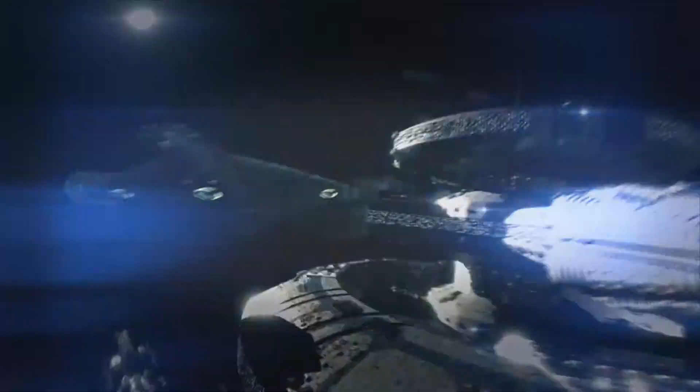Would you like to be able to see into the future? That is an intriguing question that has been contemplated time and time again throughout human history. Famous stories from the Oracle of Delphi all the way to the hysteria around the Mayan calendar in modern times have in some way dealt with the idea of humans seeing into the future. This idea has shaped popular culture and our science fiction with that one tantalizing idea of what if.

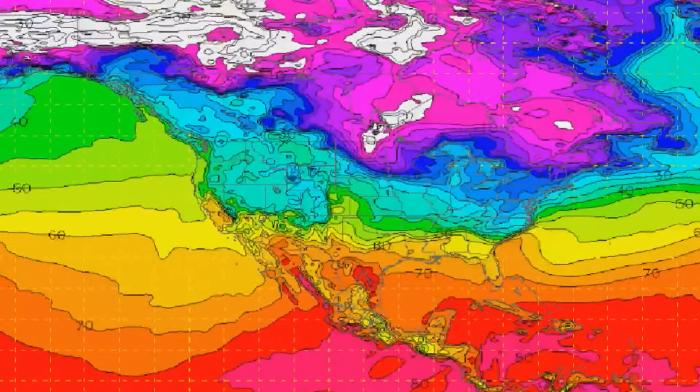In the real world, the answer to the question of can we see into the future has been answered with a resounding no. In our ever-evolving society, the trend today is to look toward the future by relying on predictive modeling to best predict the probability of an outcome. But we all know that even these well-thought-out predictions based on data often turn out to be not so predictable.

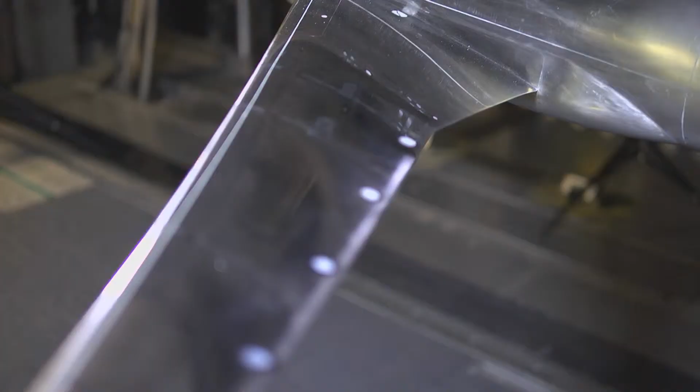Although it's clear that future events remain virtually unknowable, there is one group within NASA that comes as close as you can to seeing into the future. Throughout NASA's field centers, members of the Fixed Wing Project team are peering into the future every day and coming up with concepts that they believe will be on the next generation of aircraft. Because it takes years to plan and develop these concepts, the hardware and theories that are being tested today will be key components that enable the next generation of aircraft to take flight.

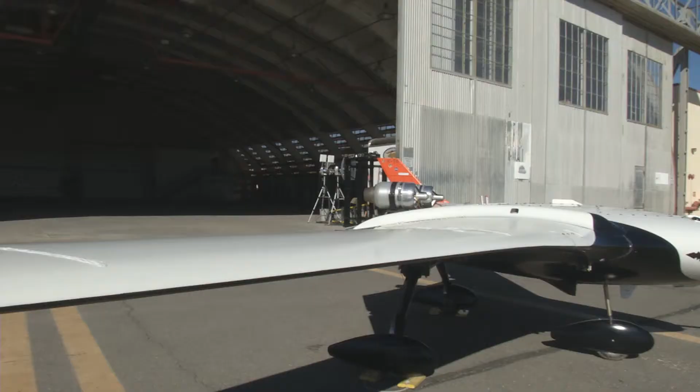On this episode of NASA X, follow us around the country as we visit members of the Fundamental Aeronautics Program's Fixed Wing Project, who are developing the framework that will shape how aircraft of the future will fly. Take a look behind the gates of NASA to see what some of these new ideas look like and how the engineers of NASA are paving the way for the ideas that will change the future of flight.

To the untrained eye, most of the aircraft of today look very similar. This is because over the past century of flight, aeronautical engineers have worked hard to optimize passenger aircraft to the point where they are as efficient and safe as possible. As a result, the basic tube and wing shape has been configured and examined from every possible angle, making it the most efficient design possible today.

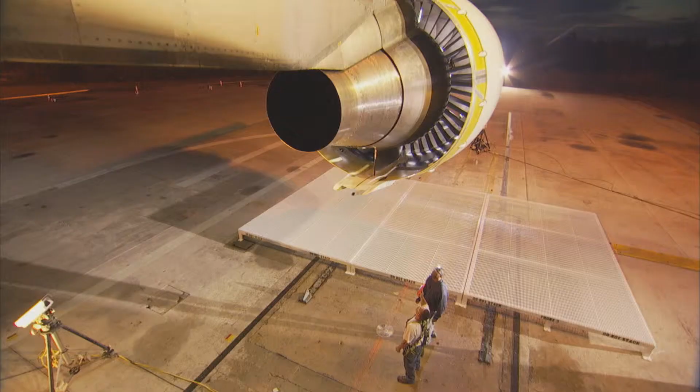Although aircraft have looked basically the same over the past few decades, if you look closely, you can see some of the major design changes. Wings that were once swept back more dramatically now are less so because of advances in aerodynamic shaping. Engines that spewed emissions by the ton are now much more efficient. Materials that were once so heavy that they significantly weighed down a craft are now much lighter and stronger.

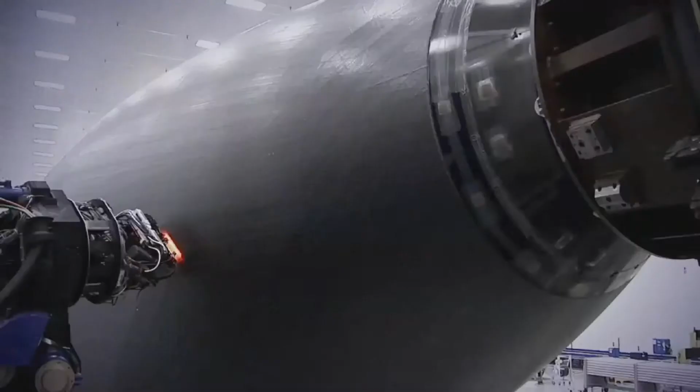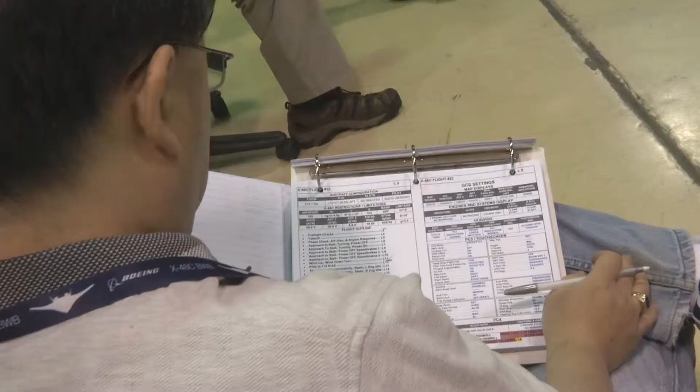With all this improvement and efficiency, it is fair to ask if there is anything else that can be done to make flight even better. The answer is of course yes. Behind the gates of NASA, there are scores of researchers who know that we can still make aircraft better because they are working toward these long-term goals every day.

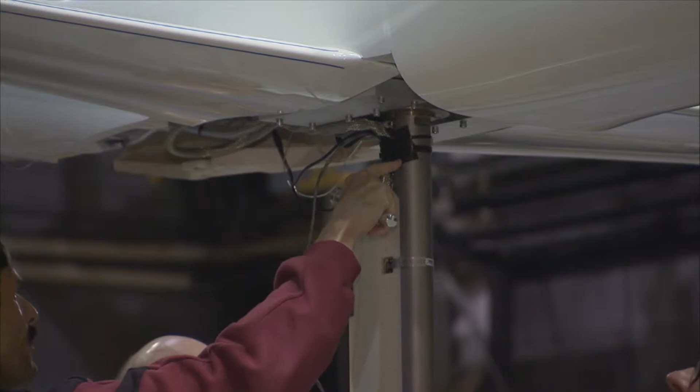Some of these researchers from the Fixed Wing Project are working on so-called N+3 configurations and goals. In mathematical terms, the letter N is where you start now. N+1 is the next step. N+2 is just beyond that, and so on. Here in the Fixed Wing Project, N+3 equates to aircraft that will be flying in around the 2030-2035 timeframe.

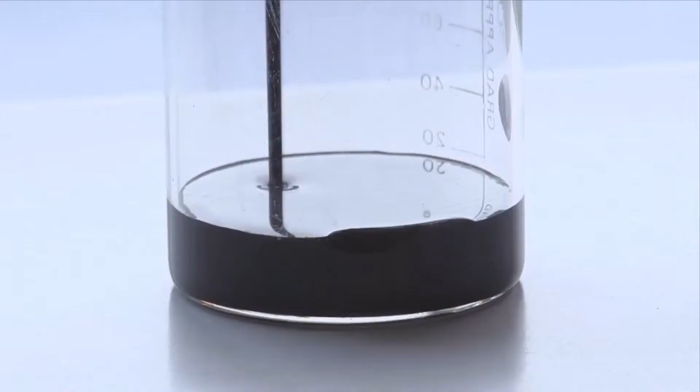For this team, everything is on the table, including engines, fuels, wings, and fuselage shapes.

Well, we need to remember the first A in NASA is aeronautics. So it's a National Aeronautics and Space Administration. Aeronautics is the field of research for airplanes. The airplanes that we fly today were researched and experimented within NASA many years ago. So we're trying to continue that tradition, that important work that we have done for the nation and the world for 20, 30 years from now.

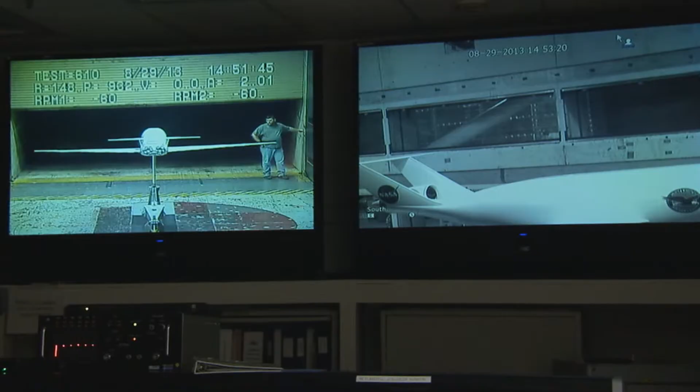Fixed Wing is a NASA research program where we are doing activities to try to improve the airplanes that we're going to be flying in the future. We're trying to make them less noisy. We're trying to make them better for the environment. We're trying to make them in a fashion that they will use less fuel.

The research we're doing is important because air travel is such an important part of your life. People travel, even if you don't travel, cargo gets carried every single day. You use something every single day that gets carried by an aircraft. It's part of our way of life these days, and it often gets taken for granted.

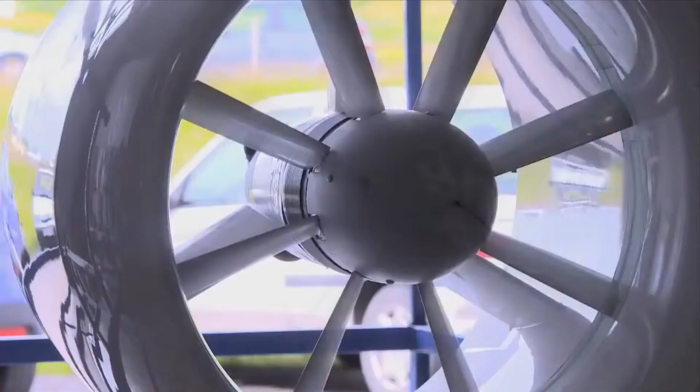There are challenges though, so we are focused on exploring and developing technologies and concepts to improve the energy efficiency and environmental compatibility of transport aircraft. With this mandate to significantly lower noise and emissions and increase performance for subsonic aircraft, there will be a need to address virtually every aspect of the current aircraft configuration, including developing new materials and engines, testing alternative fuels, and even changing the fundamental shape of the aircraft.

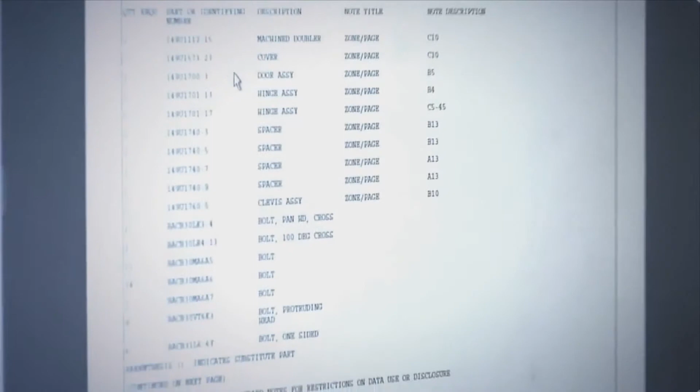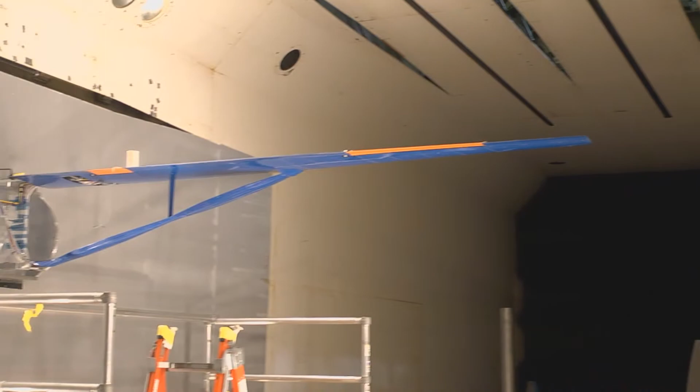All across the country, fixed-wing researchers are doing just that. Major advancements are being made into the understanding of how future aircraft will fly. Because there are so many areas of study, let's first look at something that has the potential to be used today as well as in the 2030 timeframe: alternative fuels.

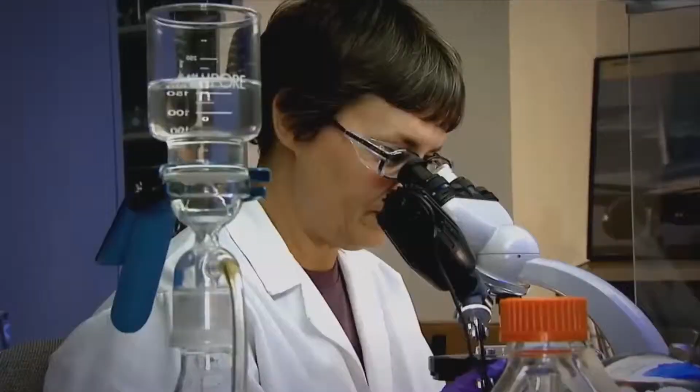On this beautiful morning at NASA Dryden in California's high desert, a test called ACCESS, or the Alternative Fuel Effects on Contrails and Cruise Emissions test, was performed to study the effects of alternate biofuel on engine performance, emissions, and aircraft-generated contrails at altitude. For this test, two aircraft were flown in tandem. The first is NASA's DC-8, which will be burning an alternative fuel. The second aircraft is NASA's Falcon that will fly directly behind the DC-8 to measure and characterize the emissions coming out of the engines from the alternative fuel. Here is NASA's Bruce Anderson to explain.

NASA's role is in assessing the combustion characteristics of alternative fuels, as well as determining how these fuels will affect the performance and emissions from aircraft. To understand how aircraft affect the climate, we need to make measurements at cruise altitudes.

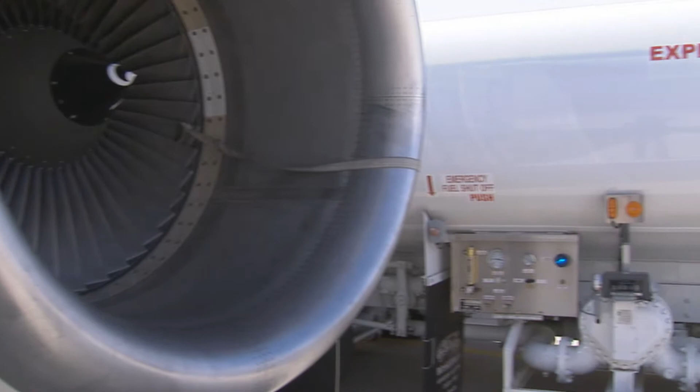So the focus of ACCESS, or the Alternative Fuel Effects on Contrails and Cruise Emissions, was to fly behind the DC-8 in flight and look at its emission and contrail characteristics as we changed from standard jet fuel to a fuel that was a blend made from camelina plant oil, with 50% Jet A added to that.

There are other groups out there. Tyson Foods is making a biodiesel and biojet fuel from chicken fat that they sweep up on the processing plant floors. So there's a number of different ways of making these alternative fuels. All of them result in a fairly clean kerosene that doesn't have nearly the contaminants that fuels from refineries do.

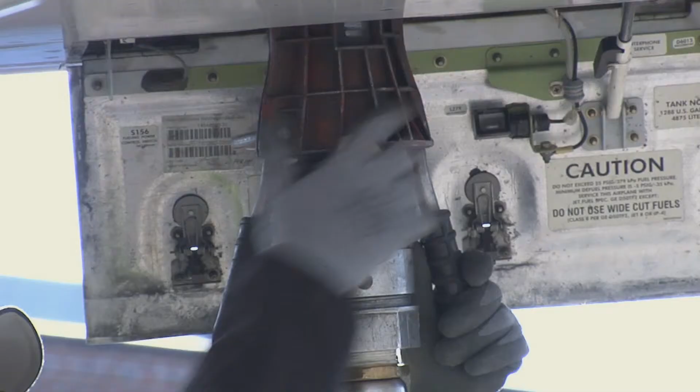The fundamental thing is the aircraft has to retain its performance characteristics when you burn a fuel. You can't have any drop in power. The fuel also has to have similar characteristics in terms of density and volume to kerosene. So what we're looking at is drop-in fuels. A lot of the fuel systems on the aircraft are designed to rely on the aromatics in fossil fuels to swell the seals and make them leak tight. So when we fly an alternative fuel, we have to mix it with standard fuel to retain those properties. Otherwise, the fuel would just leak out of the aircraft.

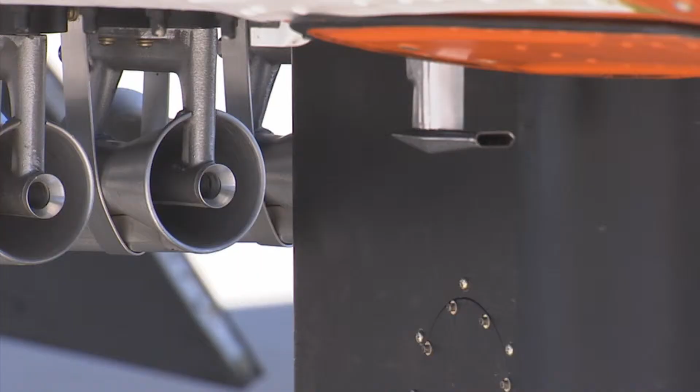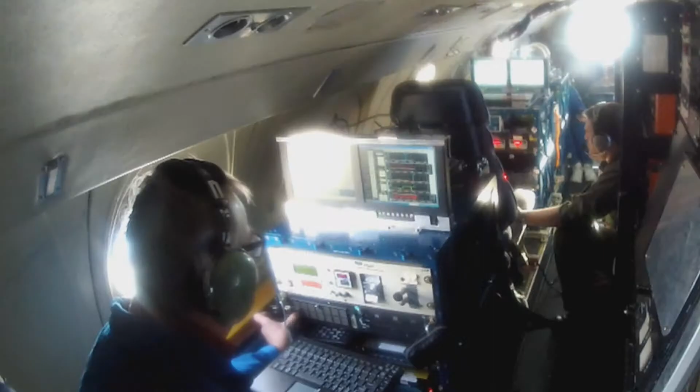And then the second thing we're looking at is just the emission characteristics—the amount of pollutant generated per kilogram of fuel burned. After the first few flights, it was shown that using these types of alternative fuels could significantly reduce emissions at cruise altitudes, particularly soot emissions. Work continues to better understand how to use these fuels and how to make them even more efficient for future aircraft.

Other than alternative fuels, there are some other ideas out there for finding more efficient ways to power aircraft. If we look on our roads today, many of the cars now being driven run on a combination of fuel and electricity. The idea that aircraft could do this seemed far-fetched only a few short years ago, but today, this idea is gaining traction. There are several ideas on how to do this, so let's take a look at a few.

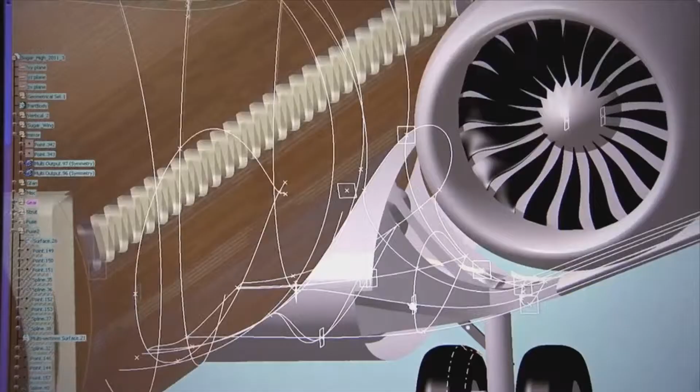Here, a team is looking over a new Boeing aircraft design called SUGAR Volt. This unique design has several interesting changes, like the truss-braced wings that have the potential to reduce the drag of the wings by making them longer and thinner. Because thin, long wings tend to flex more, designers have included a clever, efficient truss structure to support them. This design has the potential to reduce drag and weight, thereby making the craft more efficient to operate.

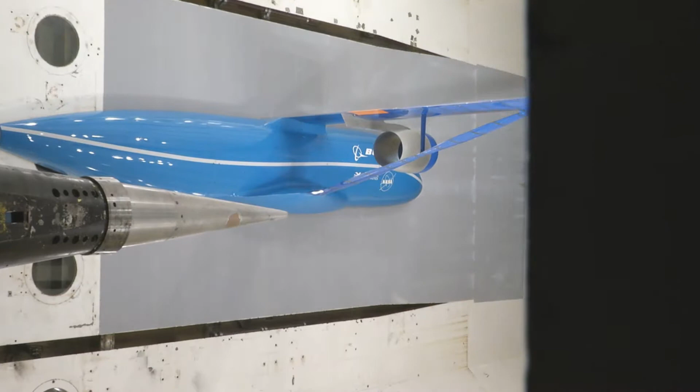At first glance, those unique structural changes may look like the biggest game changer for this type of aircraft, but the SUGAR concept holds another surprise as well. What's less obvious to the eye is that it has an unconventional propulsion system—a hybrid gas-electric concept that's closer to what you see in a Prius. It has batteries and gas turbine engine technology.

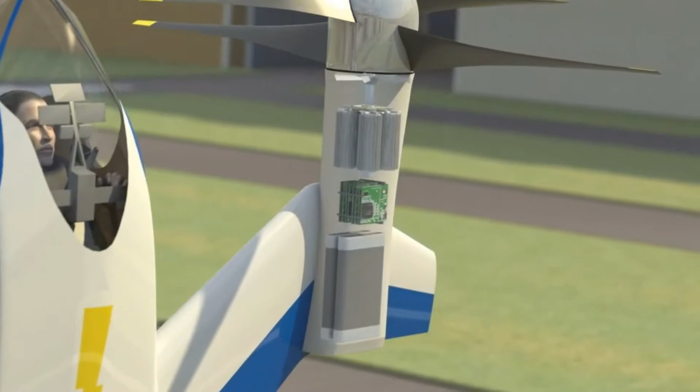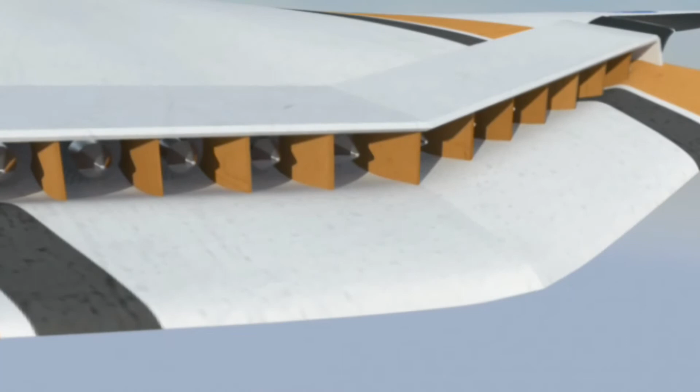It requires advances to battery technology, but those are happening throughout the world independent of the aerospace industry, and we're trying to leverage that. We do it on cars, we should be able to do it on airplanes eventually. The challenge is to take those batteries and have enough energy or power content while keeping them lightweight. Where we are today, I think, is at the dawn of the age where we could start to see electric propulsion or hybrid electric propulsion.

And you'll see it on smaller aircraft first before you see it on the large commercial transports. But that's what we're working towards. That's good for cleanliness, good for noise, good for energy efficiency. It has its challenges—that's why we're working on it, and that's why it's not being done today.

The idea behind this vehicle is to have its twin engines burn fuel when great power is needed, like at takeoff. But when the craft is in a cruise configuration, a switch can be made over to a battery electric mode to supplement or even replace power to the engines. If successful, this could reduce fuel burn by up to 70%.

Another concept called turbo-electric propulsion is being studied here at the NASA Glenn Research Center. Here is NASA's Jerry Brown to explain.

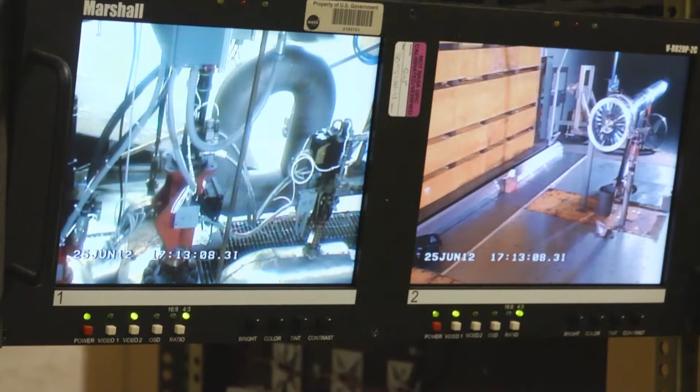There haven't been electric airplanes except in very small sizes, and the reason is that electric motors and generators tend to be too heavy for flight. We're hoping to change that, and we're hoping to get a benefit from saving a whole lot of fuel in the process. The type of electric propulsion we're talking about today is turbo-electric propulsion. We're going to keep the turbine engine because it's really good as far as a lot of power in a small power plant, and then we're going to use its power to drive a generator, send electricity to motors that drive fans that do the propulsion.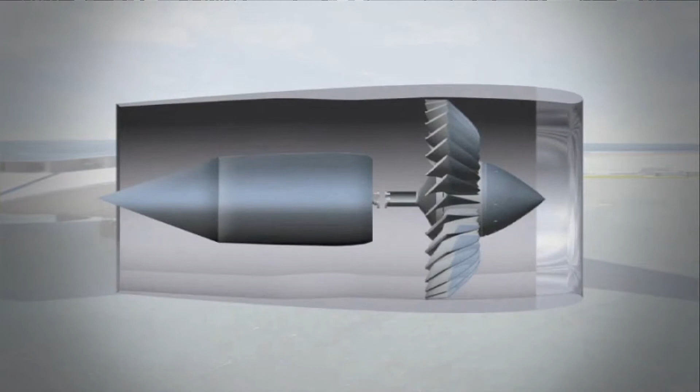This concept will look very different from vehicles of today as well. Potential designs include two large turbine engines on the wingtips that will drive two large generators inside the body. The generators will in turn power a number of fans, providing the propulsion the aircraft needs to fly.

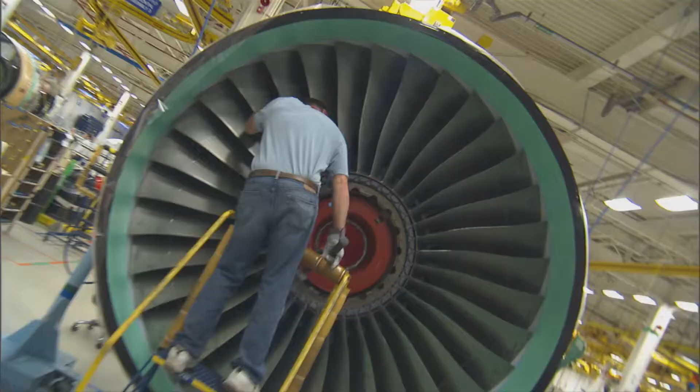What we want to do here is be able to break the turbine engine from the fan, and that gives the aircraft designer a lot of freedom. If he can move the turbine engine somewhere else in the airplane, that may itself have advantages. The engine and the fans don't have to turn at the same speed. You don't even have to have the same number of fans.

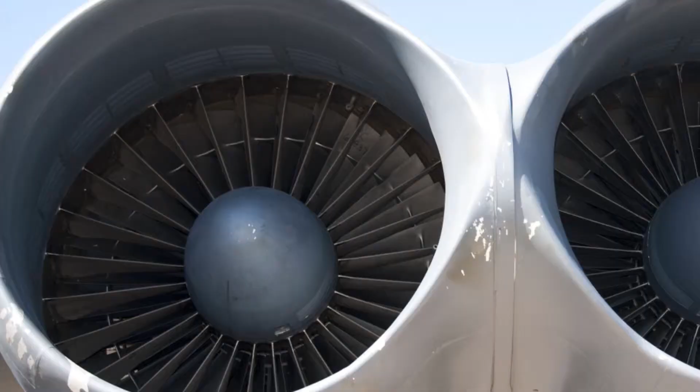And that's what we're really looking for, an array of a whole bunch of fans, maybe 15 of them, say, and just 2 engines. You like to keep just 2 big engines because the big engine is much more efficient.

This idea is intriguing, but big changes need to be made to make it viable. One major challenge is the need to reduce the size of the generators, because the generators of today are way too big to fit on an aircraft. One idea the NASA team is looking at is a way to remove the current type of copper windings in the generator and replace it with superconducting material. This change would allow the generators to shrink, making them viable to fit on future aircraft.

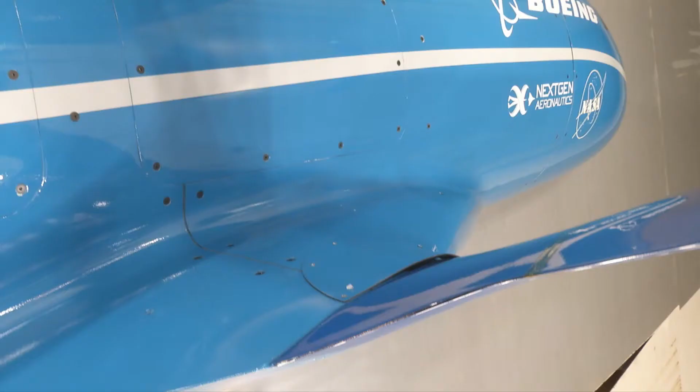As we've seen so far, new aircraft designs are coming online that have the potential to greatly improve aircraft efficiency. Another of these revolutionary designs has come out of a joint MIT and NASA study. This unique design is called the double bubble and has the potential to reduce fuel burn by up to 70% as well.

So the MIT D8 double bubble design is something we've been working with MIT on for a number of years. The idea is to take some of the lift you would normally get from the wings and try to move that to the fuselage. Another thing done to enable laminar flow on this vehicle is to reduce the sweep of the wings. It's easier to maintain laminar flow if the wings, instead of being swept back like a lot of modern commercial transports, are more perpendicular to the side of the body of the plane.

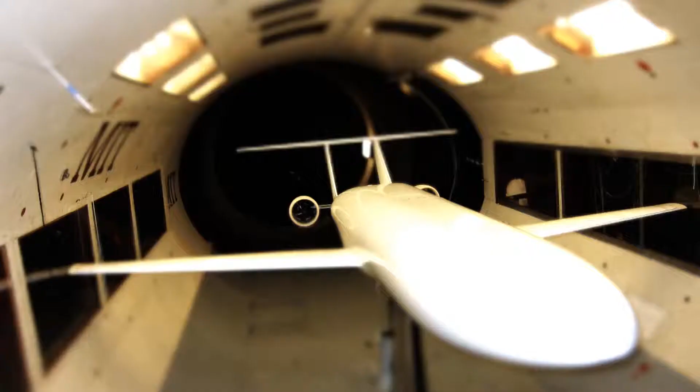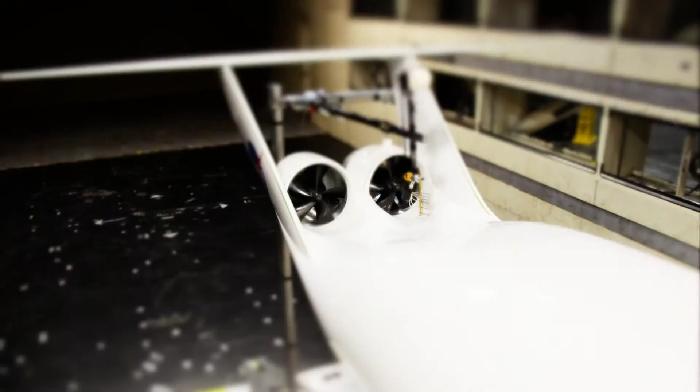In the image in the middle, the engines have been moved inside that pi-tail configuration, and by doing that we actually get some benefits. If you can use the engines to refill that area of dead air behind the plane, you have a chance at being more efficient in terms of propulsion for that vehicle given a certain amount of fuel. We're trying to push the envelope, to see what is the maximum benefit that could be obtained by this kind of configuration, to understand what's really possible in terms of fuel savings.

Aiding much of the work is improved computational fluid dynamics and wind tunnel testing. Right here in this building, we have the Pleiades supercomputer, which is one of the largest supercomputers in the US and in the world.

It has 200,000 processors working on the problem if you use the whole machine on one problem. So it's a very large machine, and we need that very large machine because we need to do very big problems here at NASA.

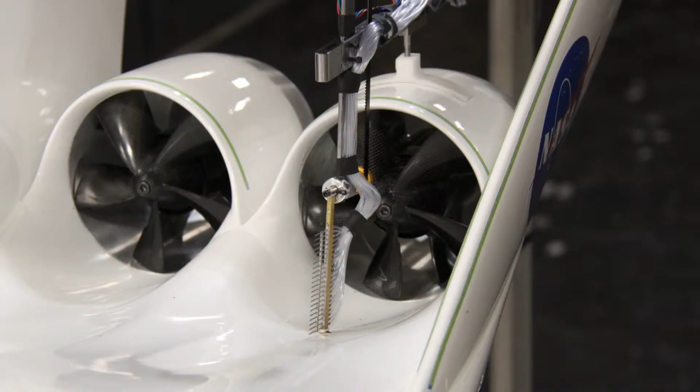The Aeronautics Research Directorate is using it to try and simulate the flow over these N+3 configurations. In order to capture all the detail you'd see on a vehicle like this, including what's going on inside the combustors of the engines, you need a lot of grid points to resolve all the fluid motion inside those engines and over the airplane. Having that many grid points to resolve all that physics in 3 dimensions creates very large computational grids that require very big machines to advance the equations that govern the fluid motion and get these CFD, computational fluid dynamics, solutions that we use to make our assessments.

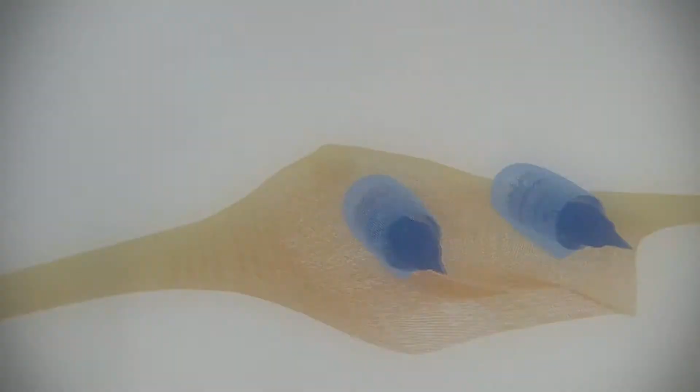Aerodynamicists of today are able to model ideas on computers, which allows them to test many different configurations before a wind tunnel model is ever built.

Once a design is agreed upon, a wind tunnel model can then be fabricated and tested. This process was used for the double bubble as well, but the wind tunnel test showed surprising results.

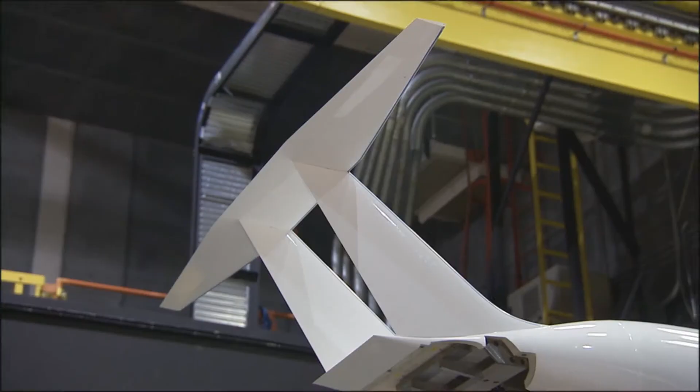The good news is that we've just completed the first test of this configuration in the Langley 14x22 wind tunnel at NASA Langley, and it showed even a greater reduction, or a more fuel efficiency benefit to this technology, than we had predicted on paper with our low-order models. So we're trying to digest the experimental data that show this nice benefit in fuel efficiency from this configuration.

At the same time, we're also using the supercomputer here at NASA Ames, the Pleiades supercomputer, to do computational fluid dynamics CFD runs of these same configurations and see if we can confirm that benefit on the computational side as well.

Testing will continue on the double bubble, and if the results hold, you may see this type of aircraft at an airport near you in the future.

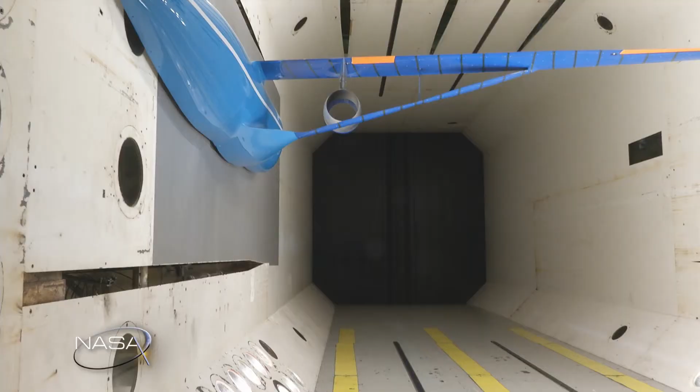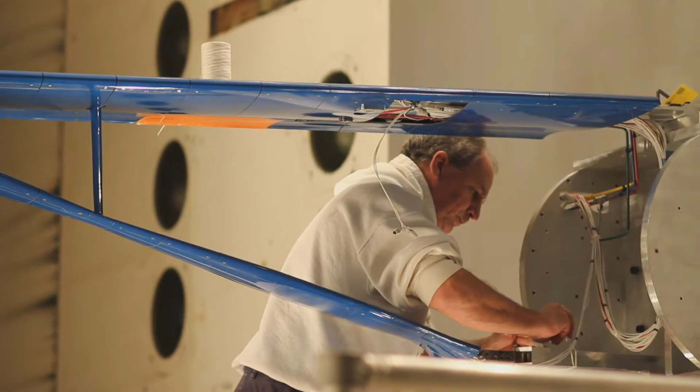When testing aircraft, many different stages occur. We have already mentioned CFD and wind tunnel testing, but another tool in testing future designs is to build a flying scale model. Although CFD and wind tunnel modeling is the mainstay, often test flights of these small, scaled-down versions of an aircraft offer some of the most dramatic results for researchers.

That is the case with this aircraft, called the X-56. This aircraft is being used as a test bed to understand how different wing configurations work and how a unique idea called active control may be used in the future.

The whole concept behind the X-56 is that they've long known that a very long wingspan vehicle is more efficient than short wingspan vehicles.

The problem is, when you get a very long wingspan, you start to get into issues with flutter modes that creep into the vehicle, so the wing will go unstable and in extreme cases will rip off the vehicle. To get around that problem, you can use active flight controls to suppress those flutter modes.

Active control is you put things like accelerometers within the wing, and as soon as you sense that the wing is starting to get into these flutter modes, you use the control surfaces behind the wing to damp that out. So the airplane, as it's flying, is continually fighting these modes and keeping the wing straight and stiff. Then you can build a lighter, longer wingspan vehicle that is more efficient.

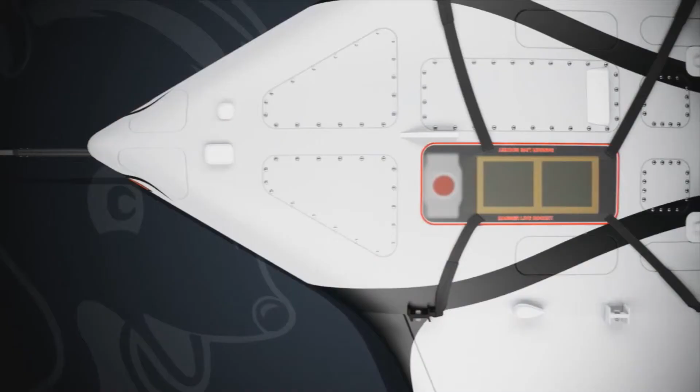This vehicle, funded by the Air Force, was built as a multi-utility technology test bed. They call it the MUTT for short, and it is built to do a lot of different kinds of testing in aeronautics. The wings are removable. You can put on a stiff wing, you can put on a flex wing, you could do a joined wing configuration. We can learn quite a bit from testing this kind of vehicle.

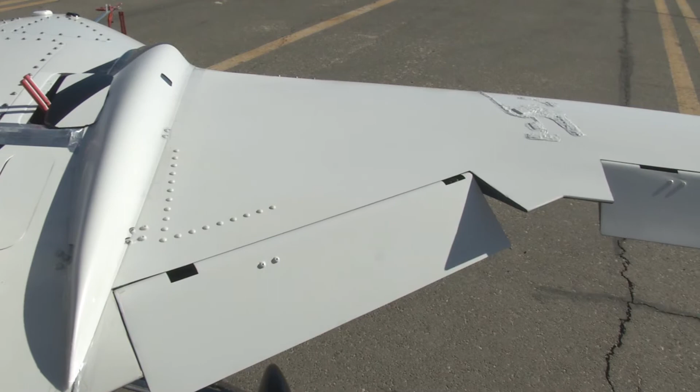Right now, the focus is on flexible wing and active control of flexible wings, but in the future, there are many experiments that can be done with this vehicle.

The research on the control of lightweight, flexible wings being performed today on the X-56 is key to enabling the long, thin, low-drag, and low-weight wings of tomorrow's N+3 configurations.

Much is going into understanding what it will take to improve the already incredibly efficient aircraft of today into ultra-efficient vehicles of the future. Although we don't have all the answers yet, it's clear that NASA and its brilliant engineers and researchers are helping to lead the way to a safer and more efficient way to travel.

We are nowhere near the maximum that we can get out of this industry. And there is a lot of work to do, and that's what my team is doing. That's what we're doing within NASA, and I cannot wait for the future.